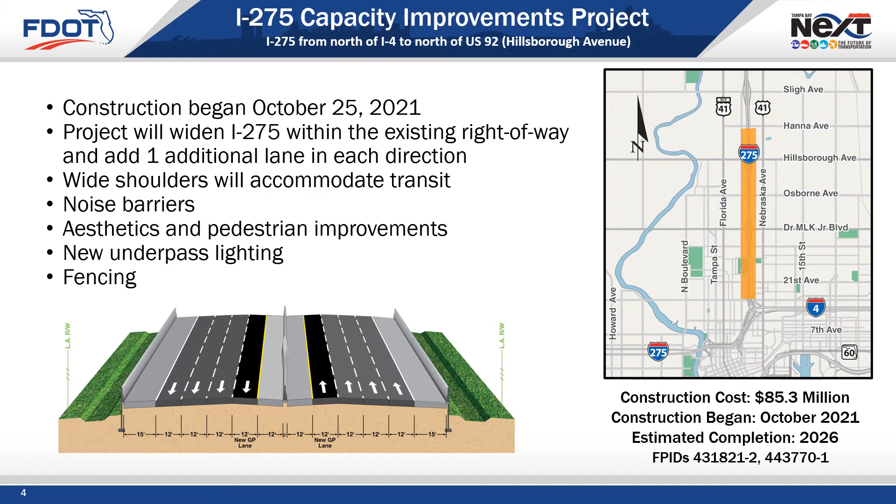The project also includes noise barriers, intelligent transportation system devices, and underpass improvements to enhance pedestrian mobility. Aesthetic improvements include upgraded lighting and signage as well as fencing. Construction is estimated to be completed in 2026.

Continuing north along the corridor, this map illustrates from south of Hillsborough Avenue to Hanna Avenue, where new 14-foot noise barriers shown with green dotted lines and new 8-foot noise barriers shown with pink dotted lines will be constructed.

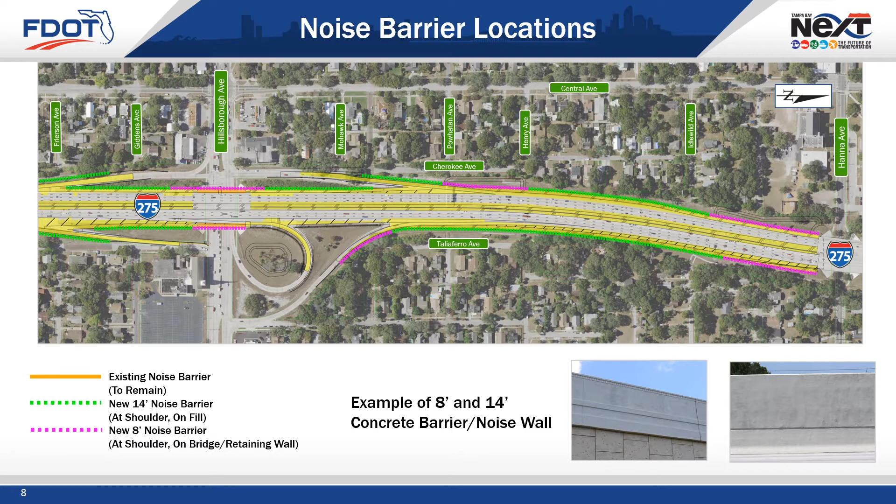This project includes aesthetic enhancements such as signs, lighting, retaining walls, and fencing. Additionally, there will be improvements at underpasses along the corridor and public art that will be installed by the City of Tampa following the completion of construction.

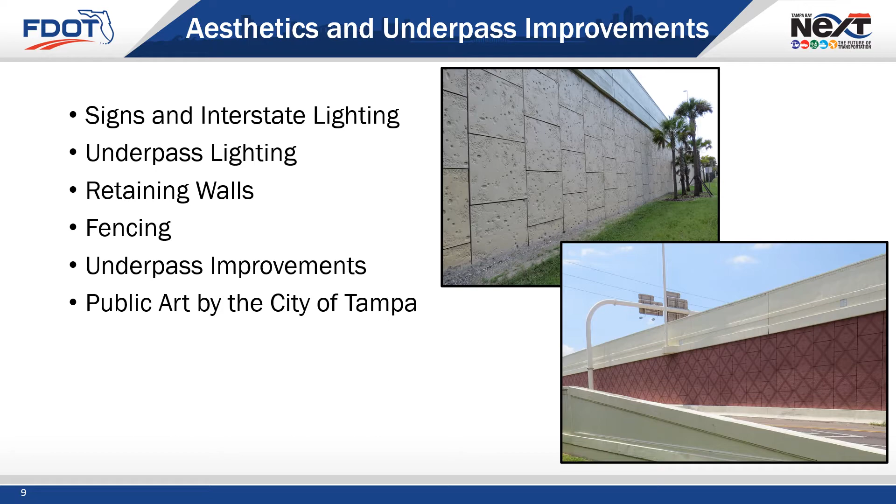New signage that will be installed includes ground mount single posts and monotube spans, which will match the existing signage along the corridor.

As part of the improvements, specialty fencing will be installed in sloped areas and places with high visibility. Additionally, where needed, gates will be installed for maintenance access.

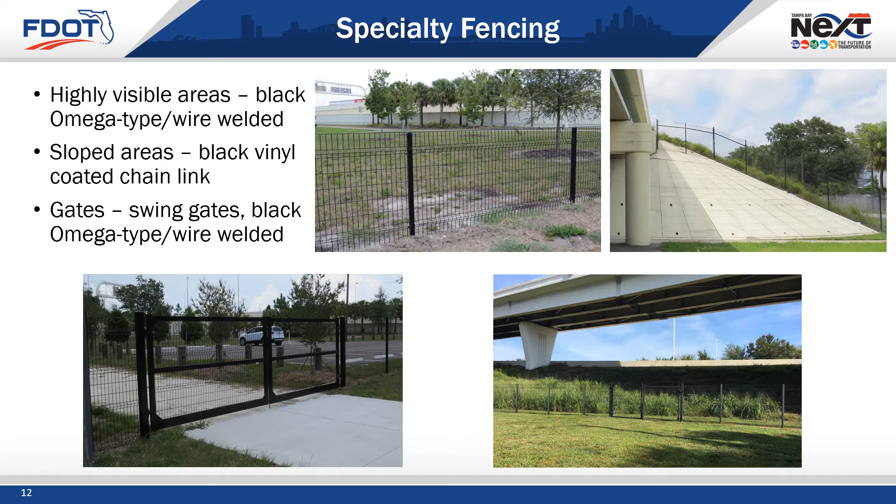The new noise barriers will help prevent access to the interstate, and fencing will be removed along frontage roads and at the inside shoulders of ramps.

The existing fencing located adjacent to private property will remain. Any damaged sections of existing fencing will be replaced, and new fencing will be added along crossroads and, where necessary, to prevent access along the limited access right-of-way between private property and the interstate.

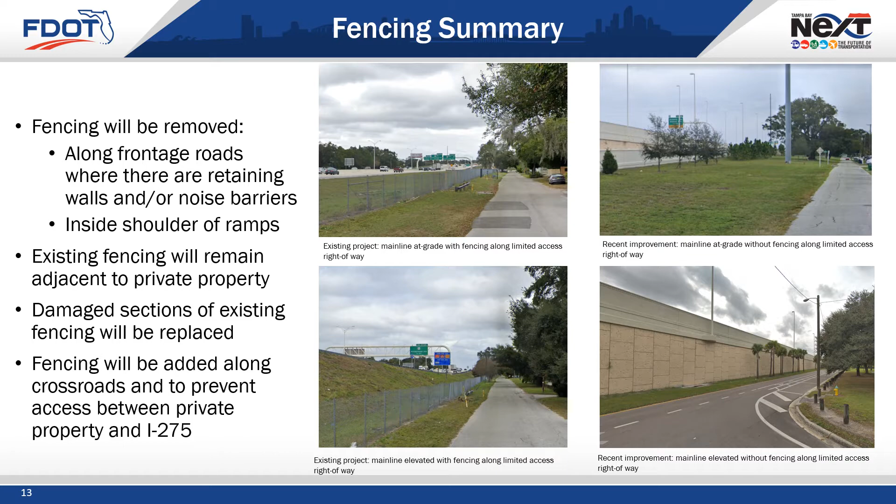Retaining walls that will be installed as part of the project will include a shell or coral panel facing from north of I-4 to south of Osborne Avenue. The retaining walls that will be installed from south of Osborne Avenue to north of Hillsborough Avenue will have a brick texture panel to match the existing retaining walls.

Additionally, the City of Tampa will install public art following the completion of the project construction at the Osborne Avenue and Hillsborough Avenue underpasses.

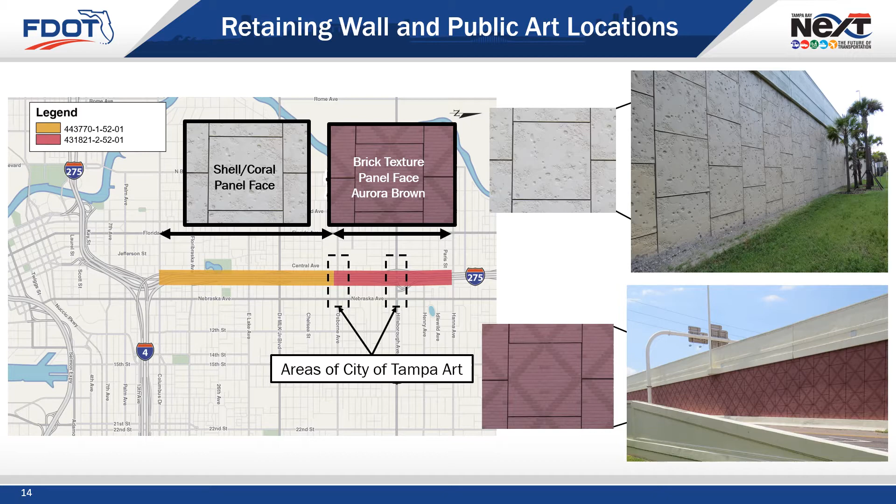At the Floribraska Avenue, Lake Avenue, and Chelsea Street underpasses, retaining walls with a shell or coral panel will be installed. Improvements at these underpasses also include constructing gravity walls under the bridges, widened sidewalks, and installing fencing along the top of the gravity walls.

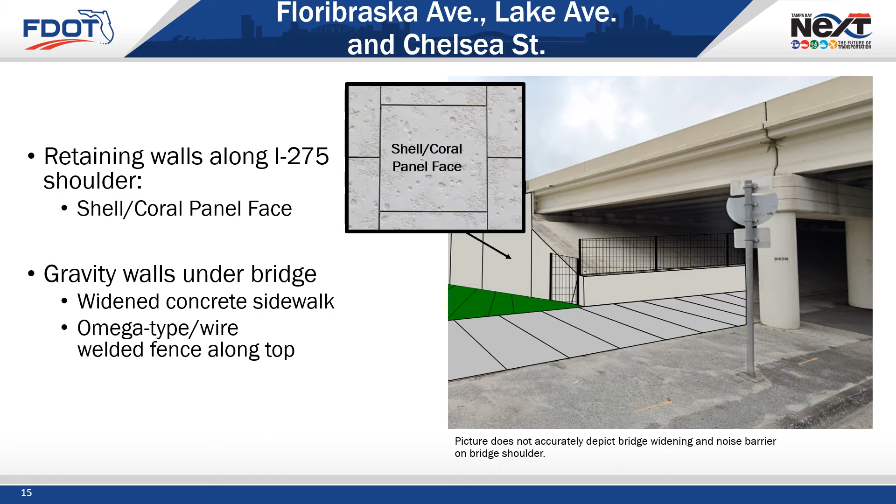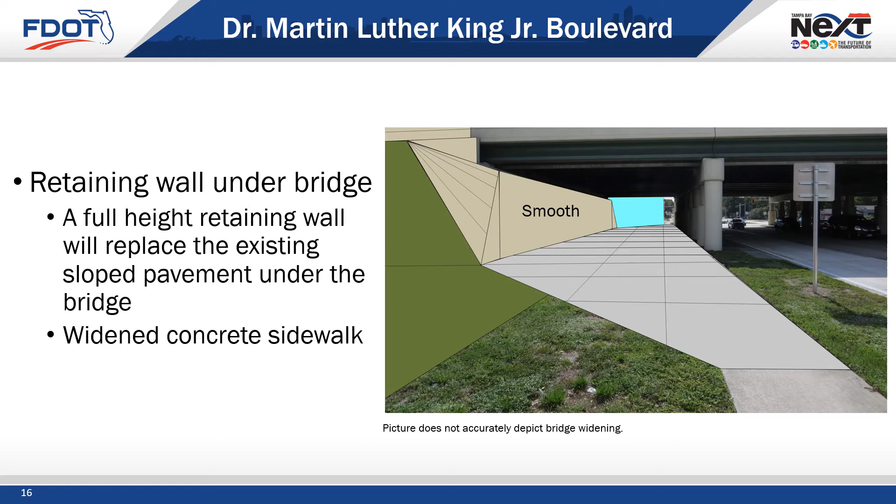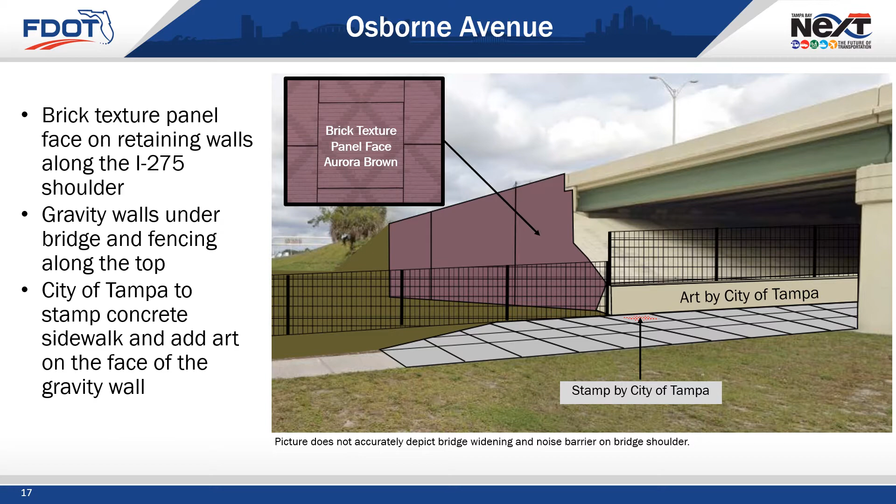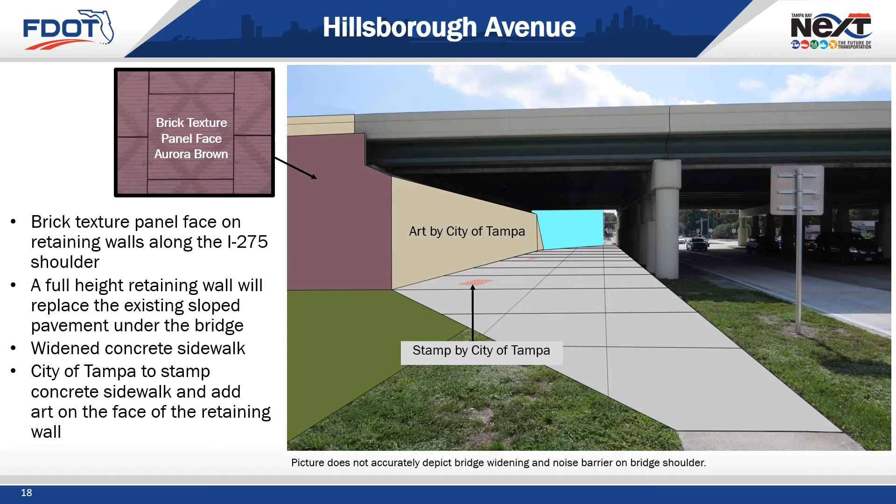The second project that is part of tonight's presentation includes the safety and operational improvements for the downtown Tampa Interchange, or the I-275/I-4 Interchange located in downtown Tampa. These improvements were part of the Tampa Interstate Study Supplemental Environmental Impact Statement. As part of the study and outreach, FDOT worked with the community, stakeholders, and elected officials to identify the safety and operational improvements. The study was approved by the Federal Highway Administration in September 2020, and construction funding was announced in September 2021 as part of the state's stimulus funding package.

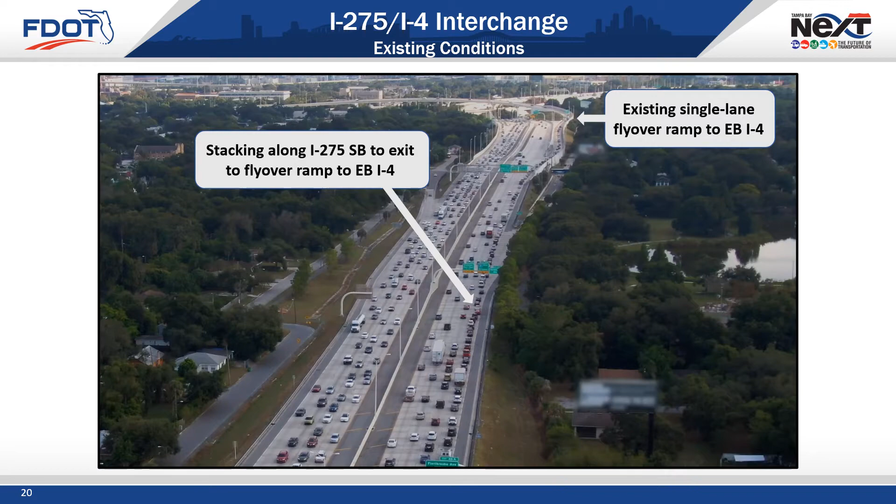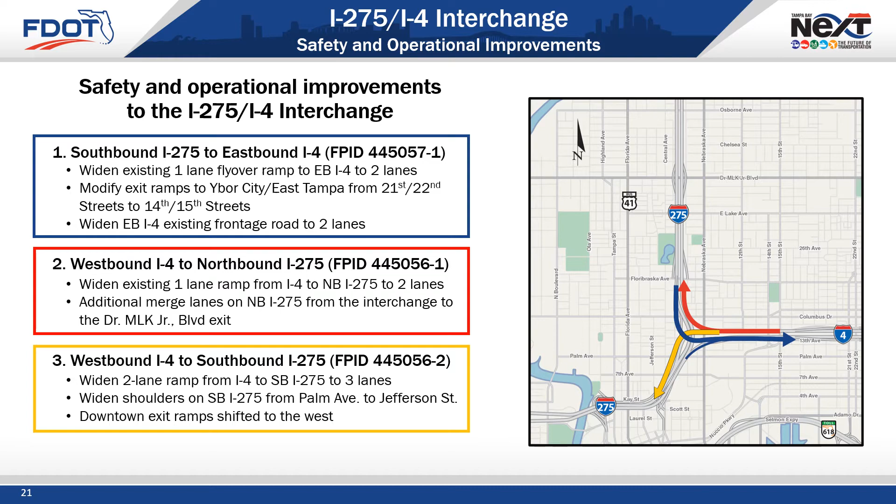To help address this backup and other bottlenecks drivers experience in the downtown Tampa interchange, safety and operational improvements have been funded for construction. The project includes widening the southbound I-275 to eastbound I-4 flyover ramp to 2 lanes, relocating the existing exit at 21st and 22nd Streets further west to 14th, 15th Streets, meaning drivers will no longer need to weave across I-4 to exit like they do today. The project also includes widening the westbound I-4 to northbound I-275 ramp from 1 to 2 lanes, and widening the westbound I-4 to southbound I-275 exit ramp from 2 to 3 lanes.

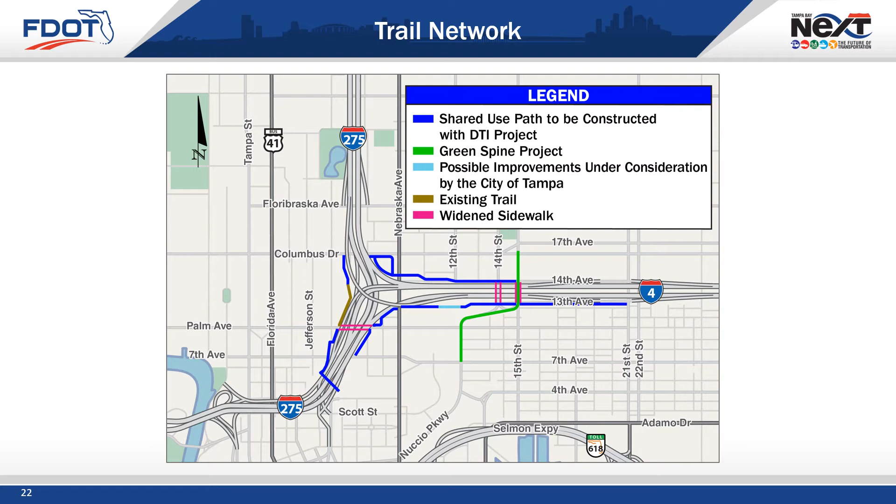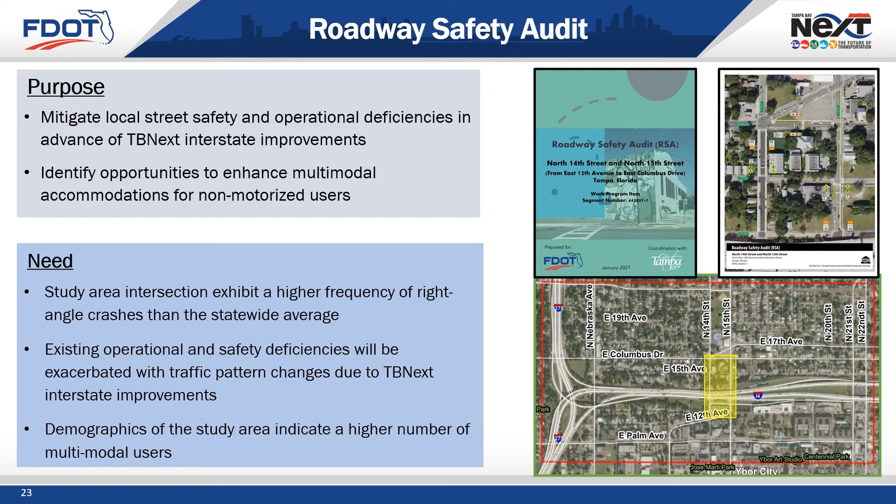As part of the local roadway improvements, FDOT and the City of Tampa completed a roadway safety audit that looked at North 14th and North 15th Streets. The audit identified opportunities to mitigate local street safety and operational deficiencies in advance of interstate improvements. It also identified opportunities to enhance multimodal accommodations for non-motorized users.

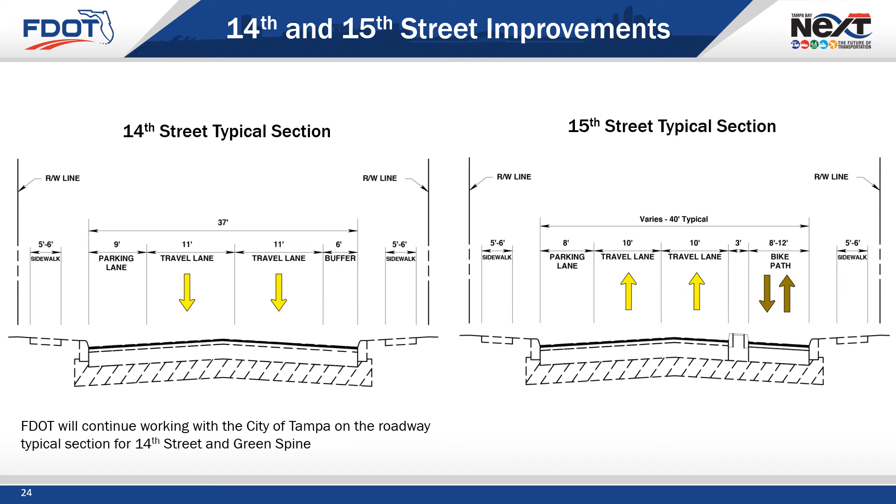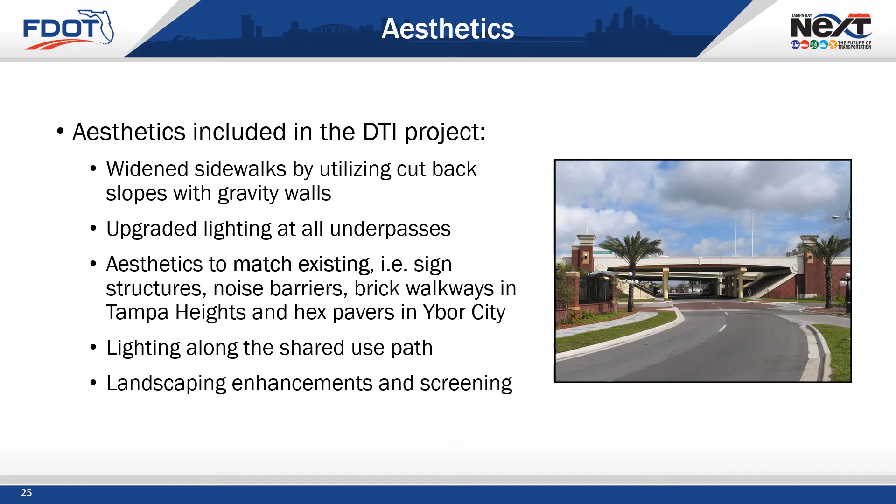Similar to the I-275 capacity improvements project, the Interchange project will include aesthetic enhancements. These enhancements include widened sidewalks, upgraded lighting, and landscaping. The aesthetics, including signs, noise barriers, and walkways or crossways, will match the existing designs in the area.

There will be new lighting installed and existing lighting that will be upgraded to LED along the corridor and at underpasses to improve visibility for drivers and pedestrians.

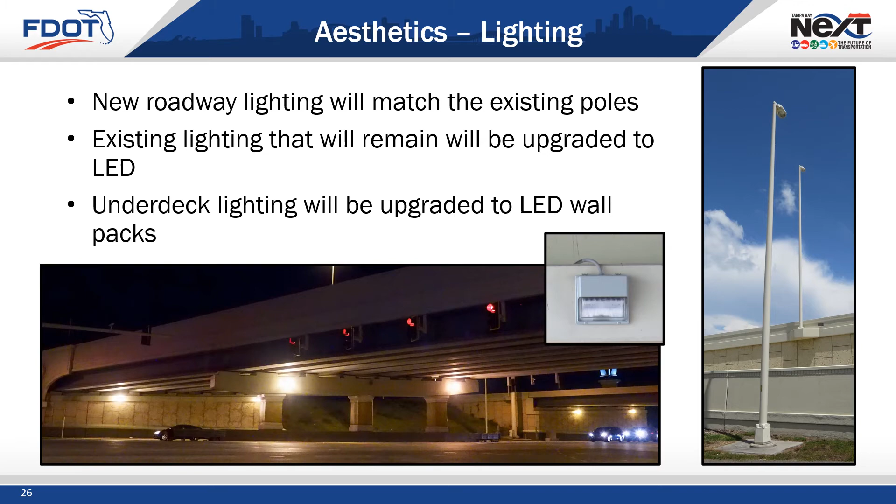Specialty lighting on the bridges at 14th Street and 15th Street will include new LED lighting. Lights affected by the bridge widening on the eastbound I-4 bridges will be replaced with new lights, while the existing

lights that will remain on the westbound I-4 bridges will be upgraded to LED. The Ybor 5 globe lights will be replaced on the south side of I-4 at the intersections of 14th Street at 13th Avenue and 15th Street at 13th Avenue.

Additionally, the Ybor 5 globe lights along the sidewalk and around the semicircular pond between 14th and 15th Streets will be replaced. New Ybor 5 globe lights will be installed along the south side of I-4 at Nebraska Avenue, 14th Street, and 15th Street. Along the shared use path, lighting will be solar powered.

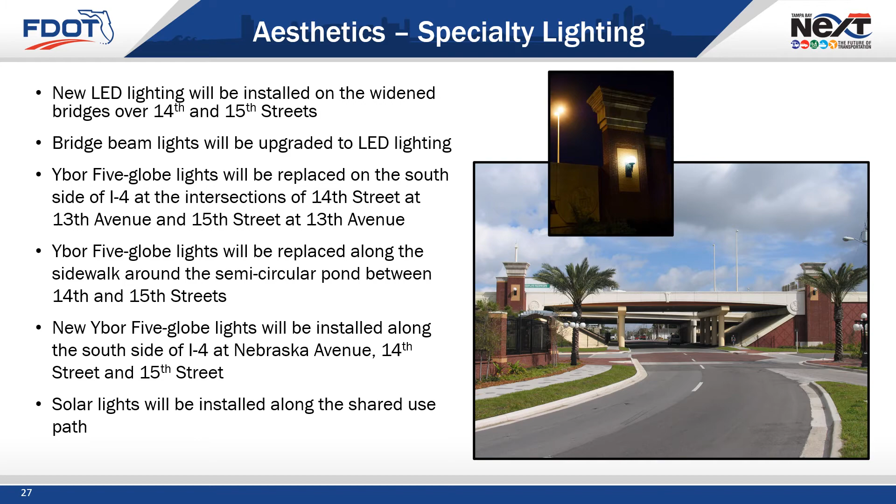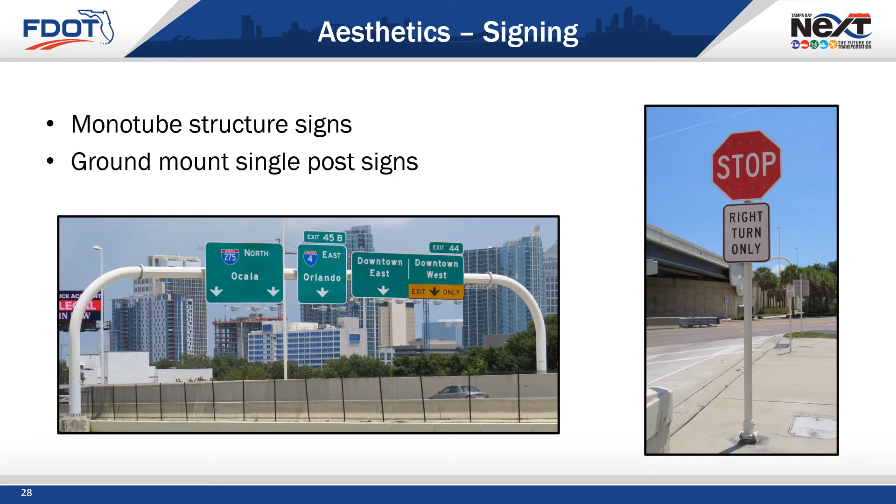New signage that will be installed includes ground mount single posts and monotube spans, which will match the existing signage along the interstates.

Today, there are already noise barriers within the project area. New noise and visual barriers that will be installed will match the existing barriers, which include the dentil detail and a sloped top. Along the new exit ramp location to 14th and 15th Streets, an 8-foot visual barrier will be installed.

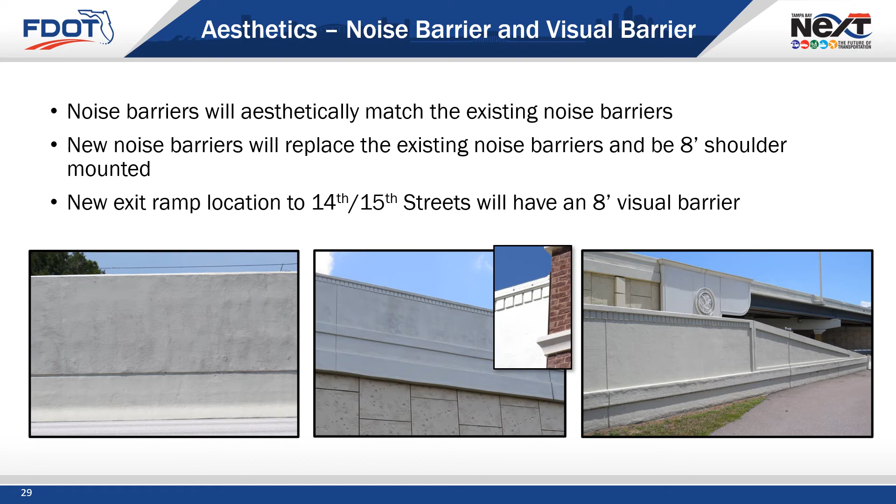The noise barriers that will be installed as part of this project will match the noise barriers that are part of the I-275 capacity improvements project located north along I-275.

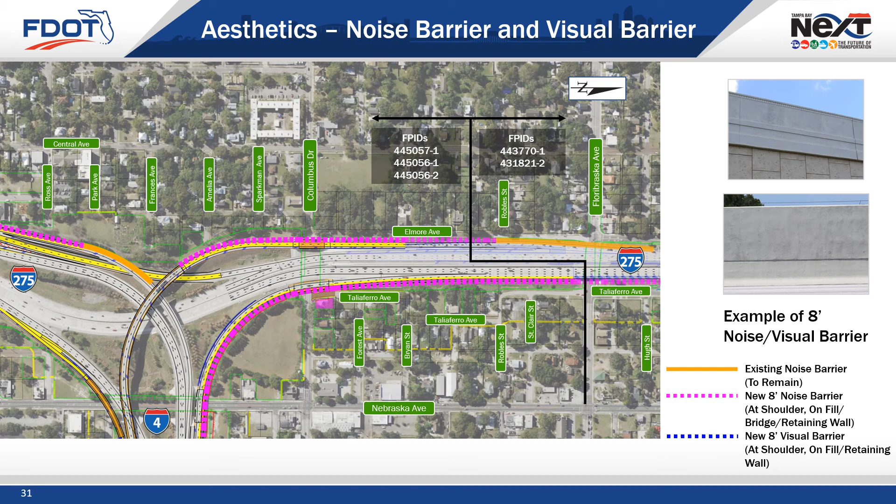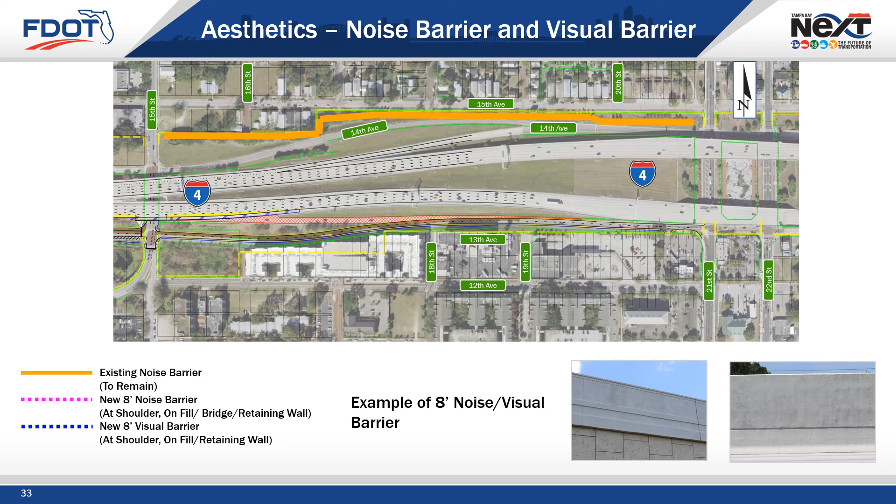A new 8-foot visual barrier will be installed along the new exit ramp to 14th and 15th Streets. Further east along I-4, the existing noise barrier that will remain is shown in orange.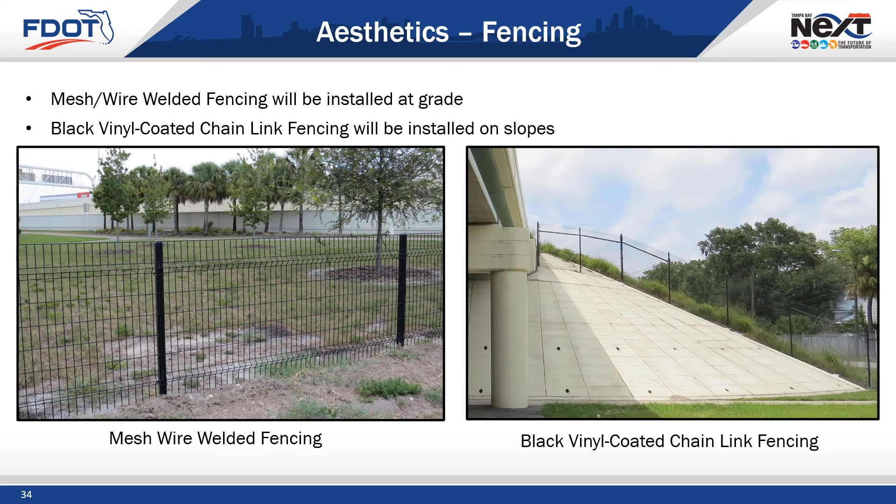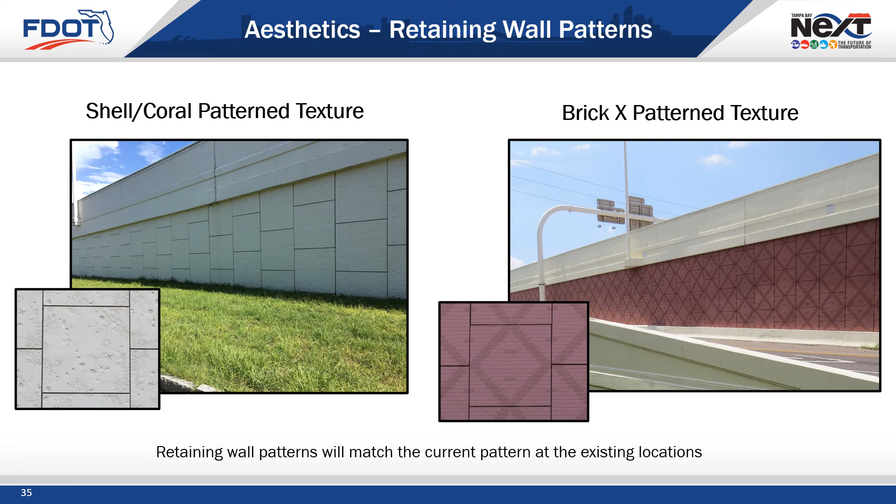The project will install fencing both at grade and along sloped areas for safety. The retaining walls that will be constructed will match the existing patterns of a shell coral pattern texture or brick X patterned texture. The pattern will match the current pattern at the existing locations.

In the project area, several types of specialty pavement exist. Specialty pavement that will be installed at select locations will consist of patterned pavement crosswalks, hex-patterned stamped concrete crosswalks, brick intersections, hex paver sidewalks, and brick sidewalks, matching what is there today.

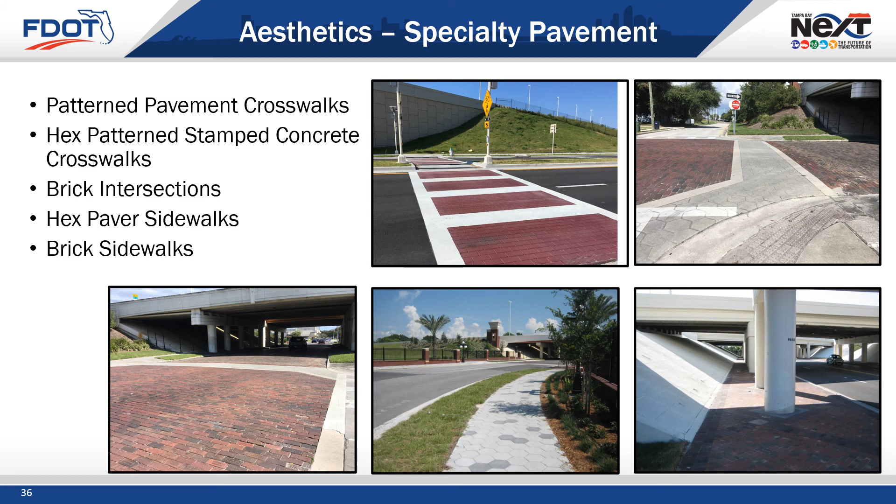At Palm Avenue, 14th Street, and 15th Street, sidewalks will be widened by using cut-back slopes with gravity walls at underpasses. Here you can see a rendering of the future condition at 14th Street looking north.

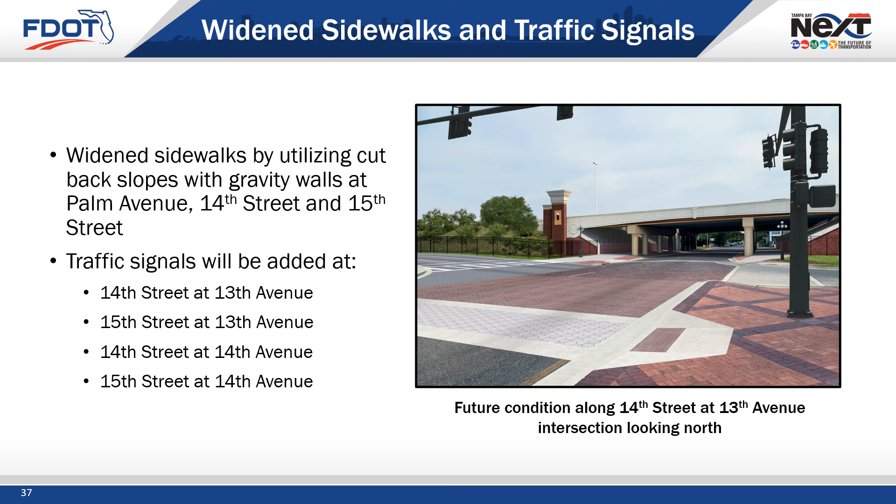New traffic signals will be added at 14th and 15th Street intersections to maintain traffic exiting the interstate and along the local roads.

In historic Ybor City, the existing aesthetic features will be replaced. At 14th and 15th Streets, the bridge will be widened, impacting these features.

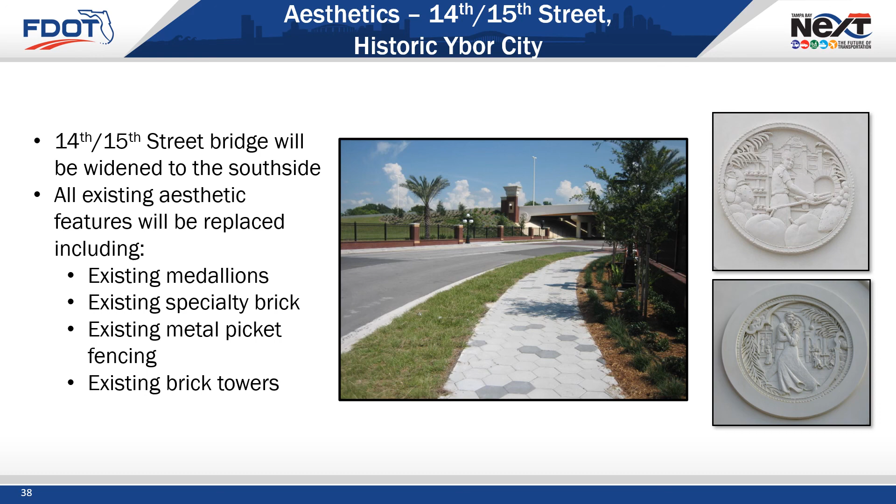All elements, including brick towers with specialty lighting, the decorative bridge fiberglass reinforced panels with the public art medallions, beam lighting, specialty brick, and metal picket fencing will be replaced. Once complete, the aesthetics will look like they do today.

Remember to be safe when driving and to move over a lane for emergency vehicles that are stopped on the roadside helping motorists. If you can't move over safely, slow down.